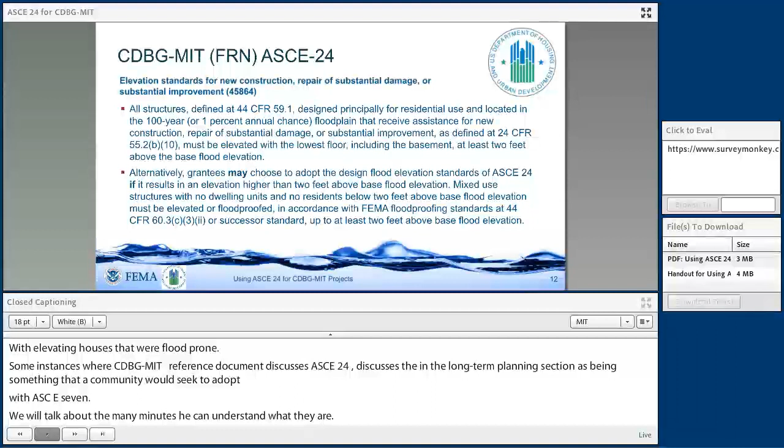One, that all structures located in the special flood hazard area, that's that 100-year floodplain or 1% annual chance floodplain, that all those that are new construction, repair of substantial damage, and substantial improvements be elevated with the lowest floor, including the basement, and we'll talk about that, to at least 2 feet above the base flood elevation.

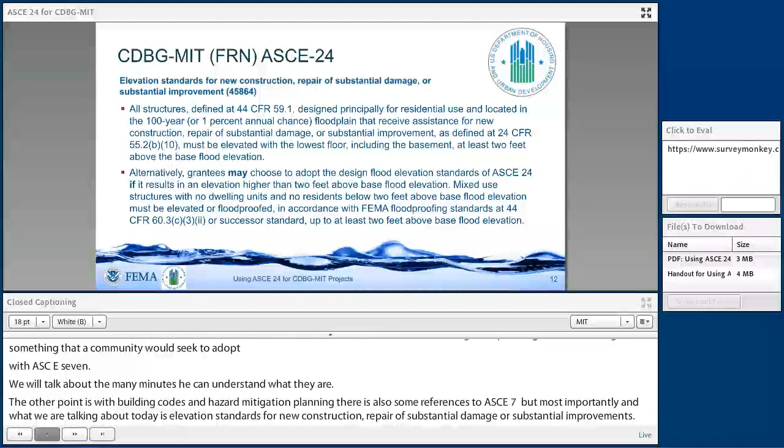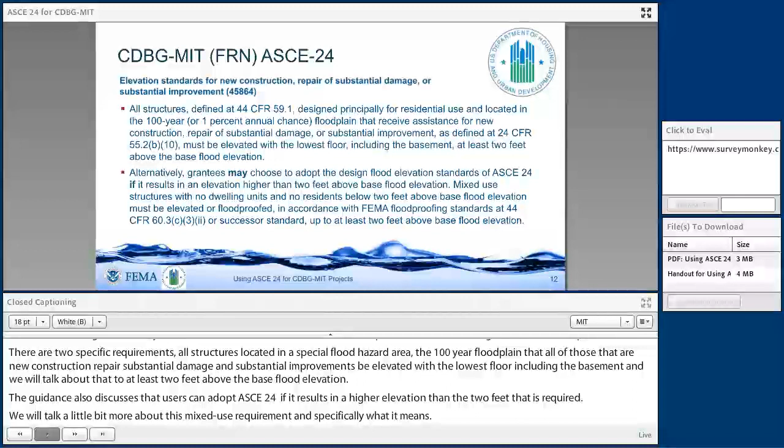The guidance also discusses that users can adopt ASCE 24 if it results in a higher elevation than the 2 feet that's required. And then we'll talk a little bit more about this mixed use requirement and specifically what that means. But a lot of what that means is you have buildings where you may have residential and commercial or non-residential uses in the same building and how those requirements apply. So we'll spend a little bit more time on that in a few minutes.

There's some handouts that you guys can download. The handout on using ASCE 24 has a copy of the agenda, who the speakers are. There's a description of flood design terms if you're not familiar with those, acronyms. Working in this industry, we use a lot of acronyms, and I wanted to clear up what those were so people didn't have questions. There's a guidance document on using a flood map and how to read the flood map and what the different parts of it mean.

There's a document on highlights of ASCE 24, flood-resistant design and construction, and that was put together by FEMA Building Sciences, so that's attached. And then we're going to spend a little time talking about non-residential structures, so we'll get into the use of the FEMA floodproofing certificate if you're not familiar with that, and I wanted to just make sure that you had that in your hands so that you could spend some time looking at that if you're looking at a floodproofing project.

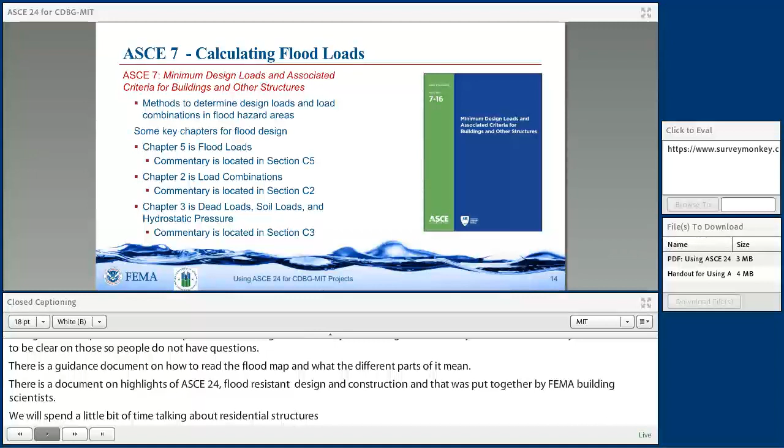So I'm going to go into two standards pretty quickly. This one first, because it's also mentioned in the guidance. ASCE 7 is the minimum design loads and associated criteria for buildings and other structures. This is where engineers would actually calculate the loads associated with buildings. And so it tells you how to calculate the loads and then how to use the flood loads in addition to the other loads that might be on the building.

So that may be the people inside the building, the live loads, that may be the dead loads or the actual weight of the building, as well as things like the wind loads, and if you're in an earthquake-prone area, the seismic loads. Chapter 5 specifically addresses the flood loads, and then you'll see there's a list of the commentary section. That's just a more descriptive section on that. Chapter 2 is on load combinations. As I just said, that's actually how you pair those loads with the other loads to the building.

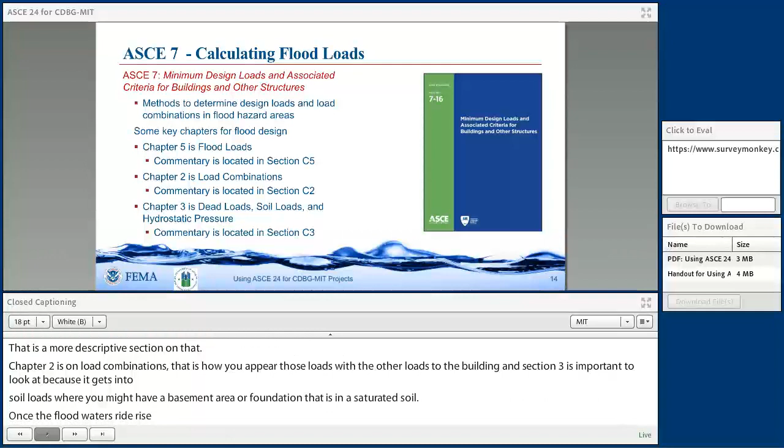And then Section 3 is also important to look at because that gets into soil loads where you might have a basement area or you might have a foundation that's in a saturated soil. So once the floodwaters rise, how those floodwaters and the soils combined are impacting the building. So those are all sections that you'll want to look at if you're looking at these flood prone projects. And then ASCE 7 and ASCE 24 are actually kind of used together in conjunction.

So this is the flood standard, that's flood resistant design and construction. It addresses construction materials, design and engineering requirements. It tells you some references for testing of materials and sort of what those other associated standards look like. ASCE standards are developed through a consensus process. That means there's balloting in a committee and there's a public review process. And these people that are on these committees are industry organizations and professional associations, along with FEMA's got representation.

So ASCE covers construction materials, design and engineering requirements and testing procedures. As I said, it was a consensus document, and it was worked on by several industry organizations, professional associations, as well as there are also engineers, contractors, as well as federal government representation. And it's typically incorporated into the building codes through a reference.

So a brief overview of the sections. Section 1, or chapter 1, is a general section with scoping and definitions and some basic requirements, also the tie to ASCE 7. Chapter 2 are the basic requirements for most riverine flooding areas, so areas where there's not a high coastal hazard. And then Chapter 3 are high flood risk areas. You'll see a listing there of different types of areas where there may be extreme flood conditions.

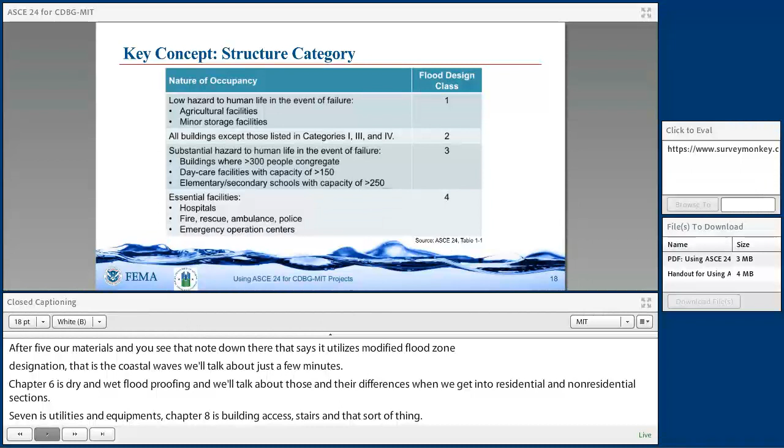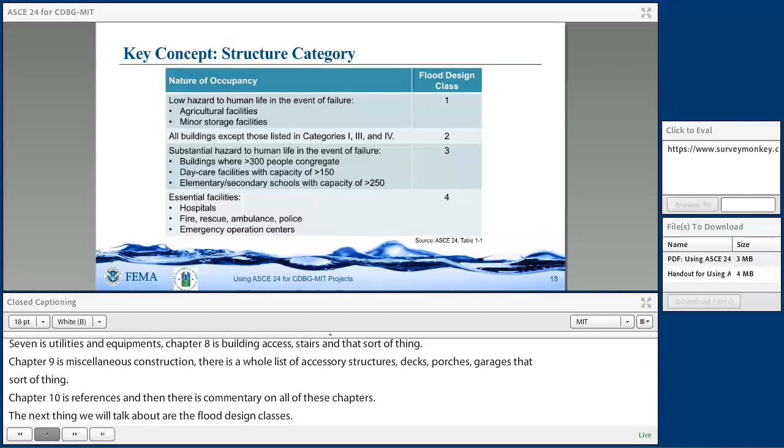And the next thing we're going to talk about are these flood design classes that buildings are broken into. So there's approximately 4 classes. Class 1 are mainly agricultural type buildings. Class 2 are the majority of buildings. That's going to be mainly your residential and non-residential commercial type buildings. Class 3 are going to be large occupancy areas like schools, but also a lot of your utilities like water treatment and wastewater treatment facilities fall into this. And then flood design class 4 are essential facilities. Think hospitals, fire, rescue, ambulance, police, and then emergency operations centers.

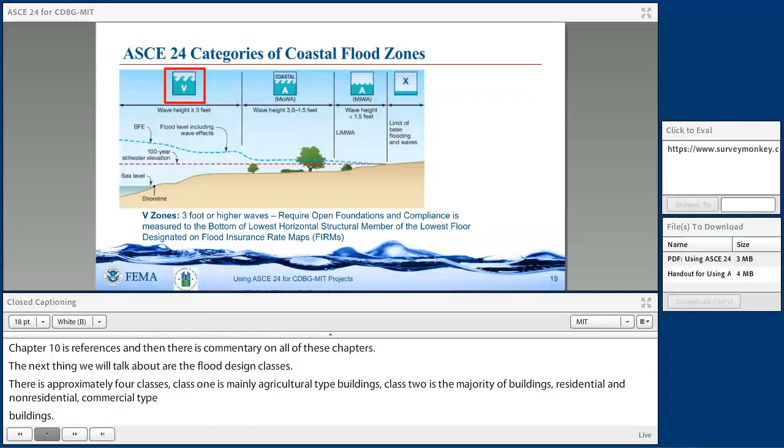So talking about these flood zones that ASCE 24 covers, the V zone are areas right along the shoreline where we have 3-foot or greater waves. There's some specific requirements to what the foundations need to be built to in these areas and how high the buildings need to be. We're going to show you a diagram later on that talks about this bottom of the lowest horizontal structural member as how the elevation is rated.

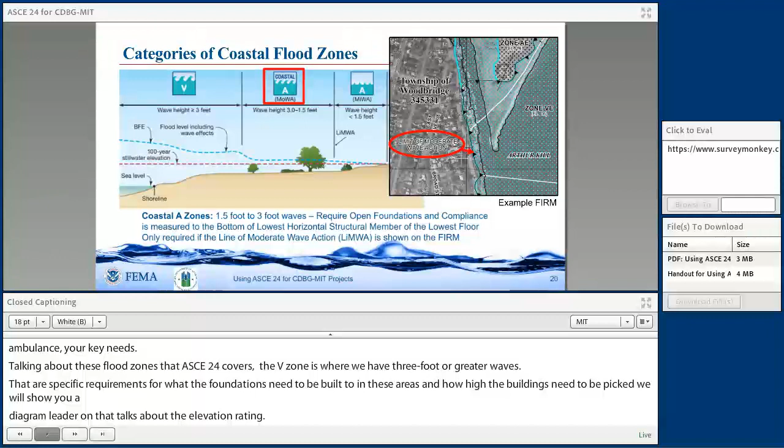So then we get into coastal A zones. That's where we have 1.5 to 3-foot breaking waves. ASCE 24 requires similar compliance to the V zone in these areas, and these are newly mapped on the more recent flood maps, and we've got a diagram that shows where they are. You're required to use these when the map actually delineates that or when the community delineates that. And A zones are areas where we have less than 1.5-foot waves. In these areas, your standard compliance is similar to what you're used to probably in riverine zones.

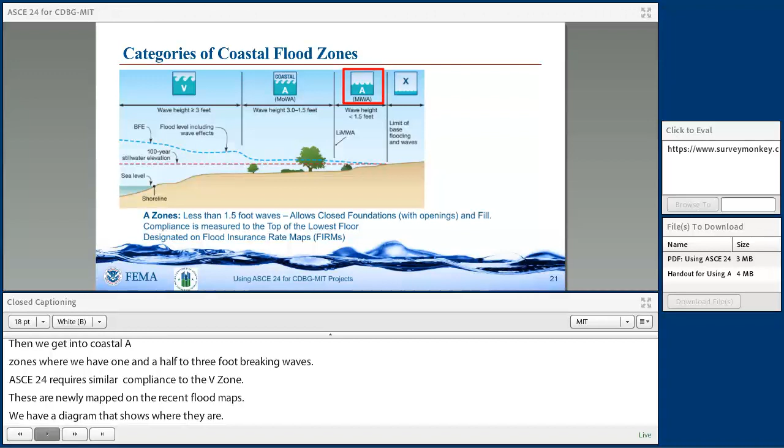The next thing I am going to talk about is these riverine zones and what those flood zones look like. There's a whole list of different flood zones for these. We typically refer to these as A zones, but you'll see them on the maps listed as A zones, AE zones, and on the older flood maps, A1 through 30. These are typically areas where you're within the 100-year floodplain, and that's broken up into 2 main sections. There's the flood fringe, which are those outer areas, shown with fill, those darker shaded brown areas, and then the floodway, where we want to try and limit construction because that's where the majority of floodwaters are conveyed during a flood event.

But you'll see the different types of flood zones and what they mean. Areas like AO zones are areas of shallow flooding, and there may be a depth of flooding in some of those, and other times there's not. In those, the rule is that the minimum requirement is 2 feet above the highest adjacent grade. It's a little trickier when you're using ASCE 24 to figure out what to do, but pretty much we're equating that 2 feet above grade with what the BFE is effectively in those areas in terms of minimum construction requirements.

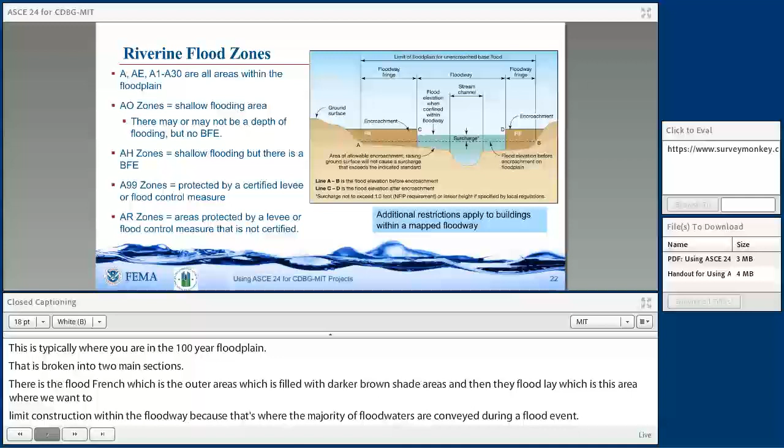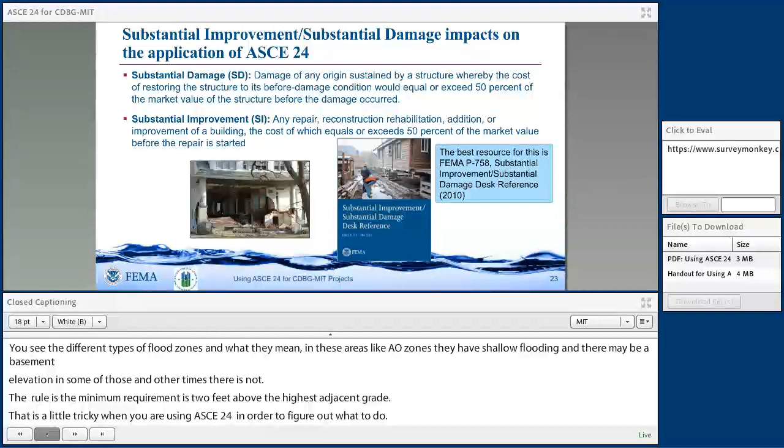As we look at these types of buildings, when we looked at the type of the requirements, it referred to new construction, substantial improvements, and substantial damage. And so I thought I'd want to talk about what substantial damage and substantial improvement are.

Substantial damage is once a building that's constructed within the 100-year floodplain is damaged by anything, that could be flooding, but it could also be a fire or tornado, wind event. If the damage or the cost to repair the structure exceeds 50% of the market value of the structure before the damage occurred, then it's determined to be substantially damaged, and it needs to be brought into compliance with whatever that community's current requirements are in terms of whatever their floodplain ordinance says. So it needs to be brought current.

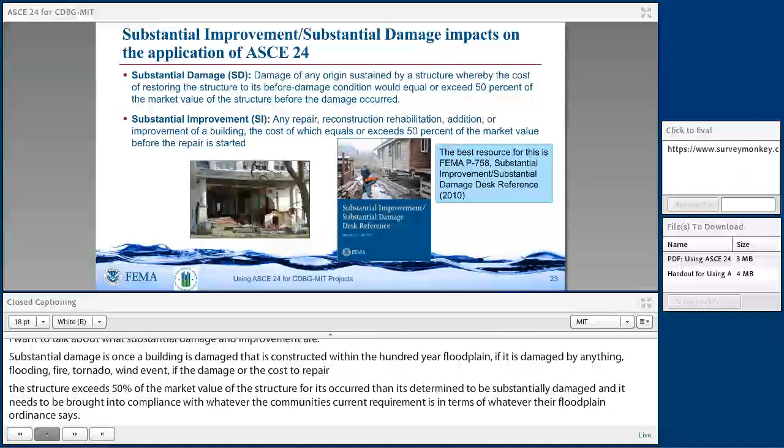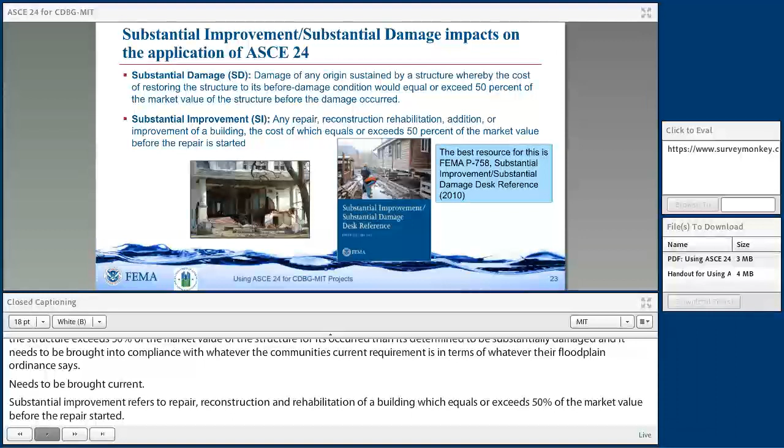Substantial improvement refers to repair, reconstruction, rehabilitation, additions, that sort of thing, of a building which equals or exceeds 50% of the market value before that repair started. There's a lot more nuance to this, and that's provided in FEMA P758. That's the substantial improvement and substantial damage desk reference. And typically the way that I look up these FEMA documents is I go to a web browser, I type in FEMA, and then whatever that publication number, in this instance it's P758, and then from there you can usually do a search and it'll come up pretty quickly.

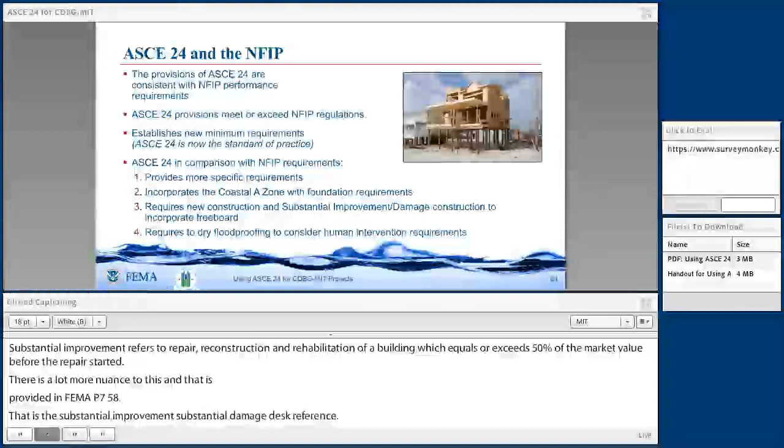So ASCE 24 and the National Flood Insurance Program, how do those two match up to each other? ASCE 24 is consistent with the National Flood Insurance Program. It meets or exceeds those National Flood Insurance Program requirements, and it establishes effectively the new minimum requirements because it's become the standard of practice with respect to the codes and a lot of adoptions with states and local governments.

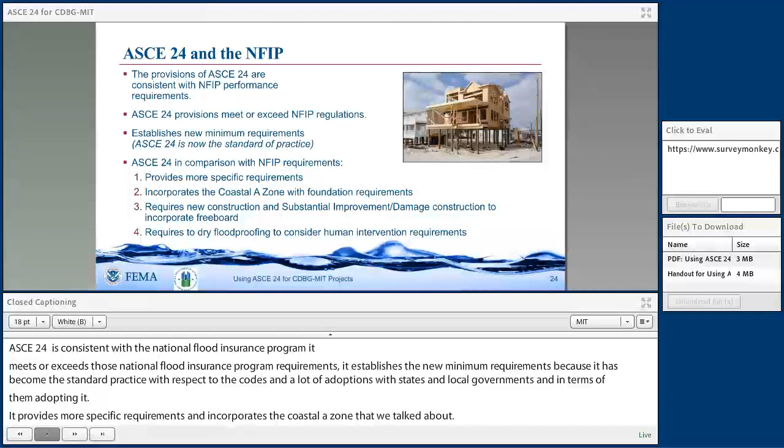ASCE 24 provides more specific requirements. It incorporates that Coastal A Zone that we talked about, and it has foundation requirements specific to that. It requires new construction, substantial improvement, substantial damage construction to incorporate freeboard. And with the HUD standard, we'll talk about how that changes with ASCE 24. It requires dry flood proofing to consider human intervention. Human intervention is when people need to install things or react in order to prepare the building to be dry flood proofed.

So how does ASCE 24 and the CDBG-Mitigation Programmatic, how do you make sure that there's compliance with ASCE 24? So if you don't have new construction or substantial improvements, in a lot of instances you may not be able to comply or be required to comply with every provision of ASCE 24, even if you have said you were going to use it as part of your grant application in terms of adopting it as part of a larger program. And you may have some instances where you're retrofitting buildings, such as elevating houses, where you may not be able to comply completely with ASCE 24, and certain sections may be deemed to comply. And I'll talk a little bit more about how that works when we talk specifically about elevation projects where you may be leaving part of the foundation in place.

Just to note that city or state building codes may require compliance with ASCE 24, and adherence to ASCE 24 may be required for compliance with other funding sources. So, for instance, if you are using this with many of the FEMA grant programs for a more recent disaster, then you are likely required to comply with ASCE 24 the way that the new policy is written. So after, I think it's September of 2016, those disasters declared after that date are going to be required to comply with ASCE 24. So you do need to look at your funding source.

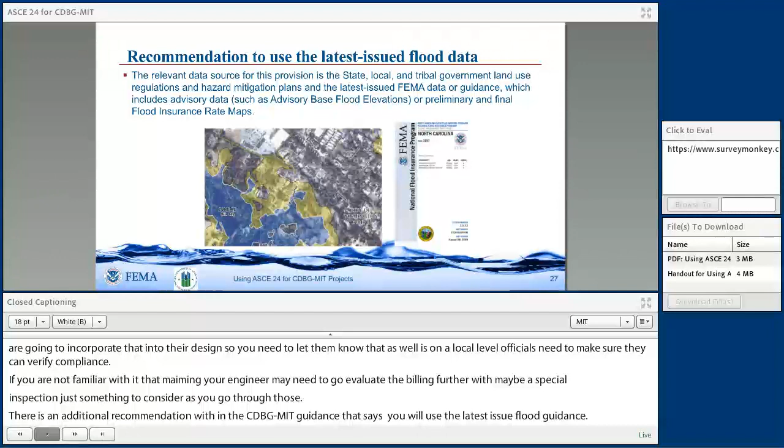There's an additional recommendation within the CDBG-MIT guidance that says that you're going to use the latest issued flood guidance. So that could be the latest, including things like preliminary flood maps, as opposed to just your effective maps. It could be using ABFEs. Those are advisory base flood elevations. So you're going to have to go through and look at what that latest flood data is that's available for that site, and apply that as part of the recommendations on using the latest flood hazard data.

Applying the CDBG mitigation projects with codes and standards and ordinances. The requirements for the projects are that they need to meet state and local ordinances. If no code exists, then the proposed project should meet a code that may be a model code that's current. And then you want to make sure that you're not in violation of any federal laws, regulations, or statutes. So you're agreeing to all of those things. If you're not in compliance with those three things, then you may have some issues with eligibility requirements.

So plan on doing a code compliance check; each project should go through a code compliance check. You should make sure that you're meeting those substantial improvement, substantial damage requirements. Those requirements are consistent for National Flood Insurance Program communities, and that's not even an ASCE 24 requirement. That's a minimum NFIP requirement. So if you're part of that program, then you're going to do that substantial damage, substantial improvement determination. And then there's lots of classifications of work that the international codes reference, and you're just going to need to make sure that you understand what the requirements of the code are with respect to that classification of work.

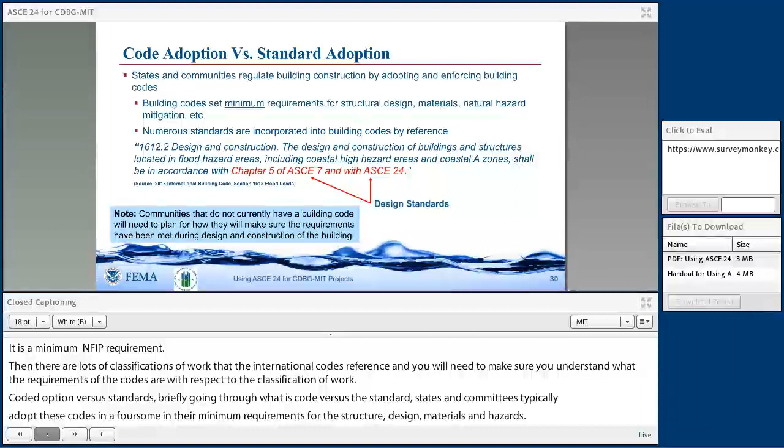So code adoption versus standards, just briefly going through what's a code versus a standard. States and communities typically adopt these building codes and enforce those, and those are minimum requirements for the structure design, materials, and hazards. And then these standards like ASCE 24 and ASCE Standard 7 are usually referenced within sections of the code saying that they will be designed in accordance with, for instance, ASCE 7 and ASCE 24. So those standards are referenced within the building codes as to what needs to be followed.

So using it with residential mitigation projects, this applies mainly to single-family, multifamily, and residential portions of mixed-use buildings. Typically, this is retrofit elevations, so think about jacking up a building, or reconstruction of a building. So this may be a building that's so damaged that it makes more sense to tear it down and then reconstruct it. Another instance is if you have a building that's in poor condition, and if you elevate that building, the wind may knock it down. It may be less expensive to just reconstruct the building. This could also happen when you compare elevation cost versus constructing a new building. There are instances where it's just that costly to elevate the building.

Dry floodproofing is not an allowable mitigation measure, but we will cover it in the next section. And then wet floodproofing, this is basically using flood damage resistant materials and flood openings to equalize the flood loads on the inside and outside of the building walls, and that's only allowable for parking areas, building access, and storage areas. Prior to design, you should look at which provisions of ASCE 24 apply and make sure that you're going to apply it to all the components that you can make comply with ASCE 24.

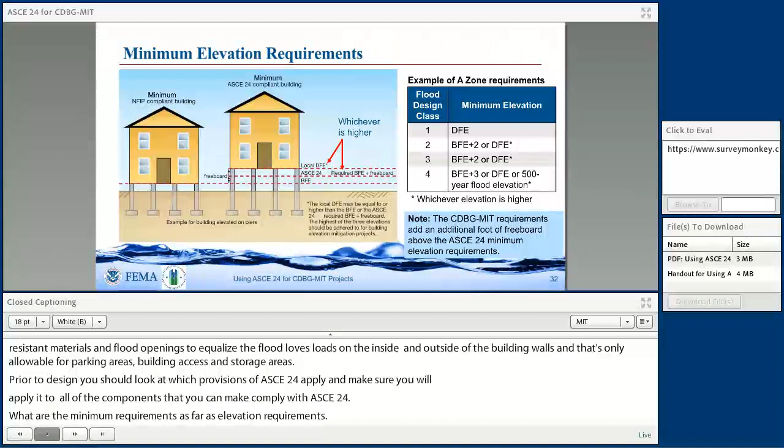Now, there are specific definitions of what that lowest floor means, because if you have a basement, that basement is included as the lowest floor. A basement would be an area, that's in your handout, where you have four walls that are below grade, and in those areas that may require you to fill the basement and no longer have that basement in that house if it's in a special flood hazard area, and then the lowest floor would be the next higher floor.

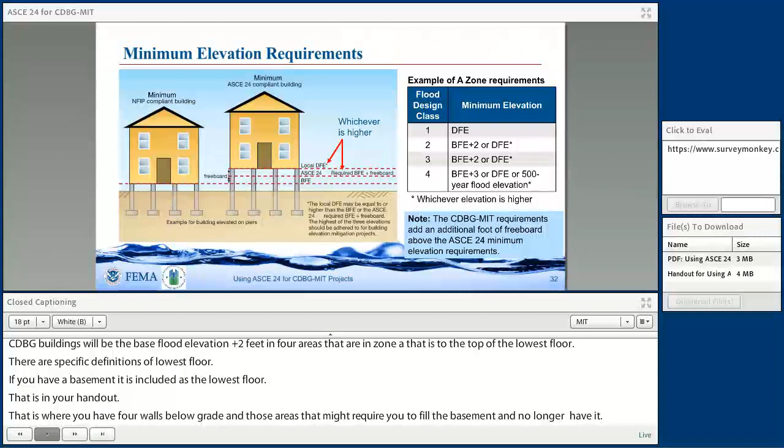So there's a requirement of BFE plus 2 unless you're talking about a critical or essential facility, and then it's BFE plus 3 or the DFE. So for residential, just think of BFE plus 2 as those minimum requirements. So in V zones and coastal A zones, similar, it's at BFE plus 2, but this is to the lowest horizontal structural member, and we've got a diagram coming up that'll show you what that is.

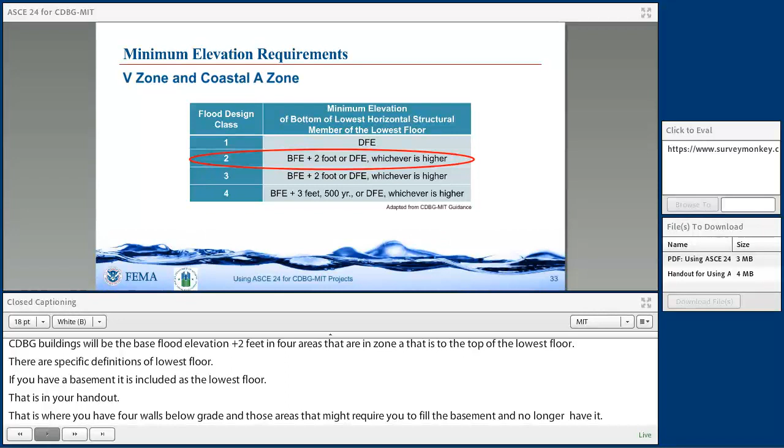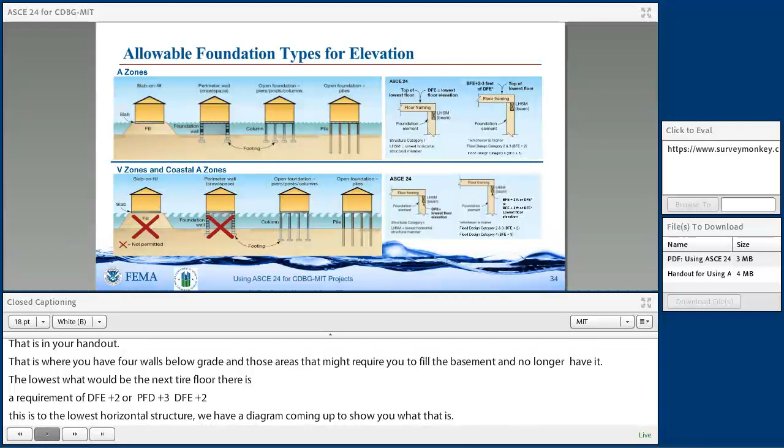So if we're looking at this, the allowable foundation types in an A zone: you're allowed to use fill, you're allowed to use walls, you're allowed to use columns and piles, all as allowable foundations. And in these A zones, the requirement is to the top of that lowest floor that's shown there on the right. If we look at the bottom area, the V zones and coastal A zones, these are areas where there's high waves and the water is moving very quickly. We're not allowed to use fill, and we're not allowed to use solid foundation walls.

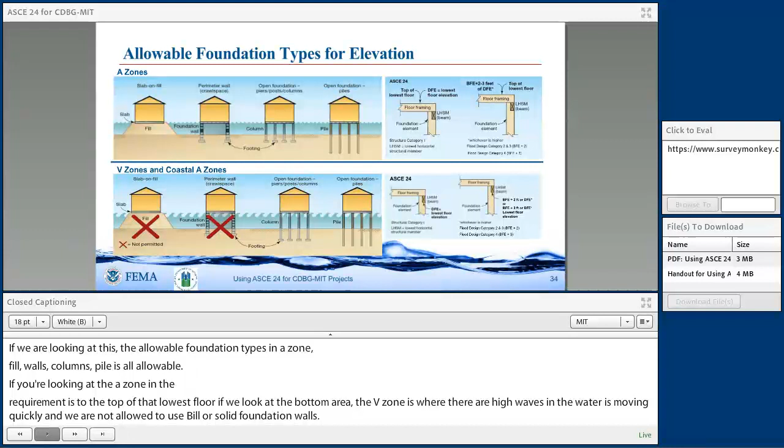So we're looking at open foundations, columns, and piles, and ASCE 24 then requires you to use that elevation guidance to the bottom of the lowest horizontal structural member, and that's shown in the diagram to the right, as you can see that kind of cross-hatched piece of lumber that would be coming out towards you if you're looking at this, and that's the bottom of that lowest horizontal structural member.

So foundation design in A zones is going to be required to resist flotation, collapse, and permanent lateral movement under these design loads, under these flood loads. It's the moving water, the still water, the buoyancy or the uplift, and then you have to have adequate connections between the foundation and the superstructure, which is just the main portion of the house. And then you need to either meet the building code or ASCE 24, whichever is more restrictive.

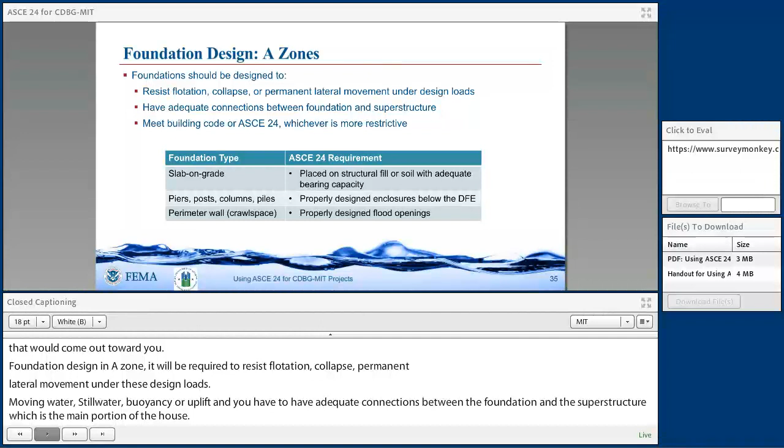And we've got some guidance on slab on grade, piers, piles, columns, posts, open foundations, as well as crawl spaces. And the big difference you're going to see with crawl spaces is that they're required to have flood openings. So we want to equalize the water on each side of those foundation walls using flood openings.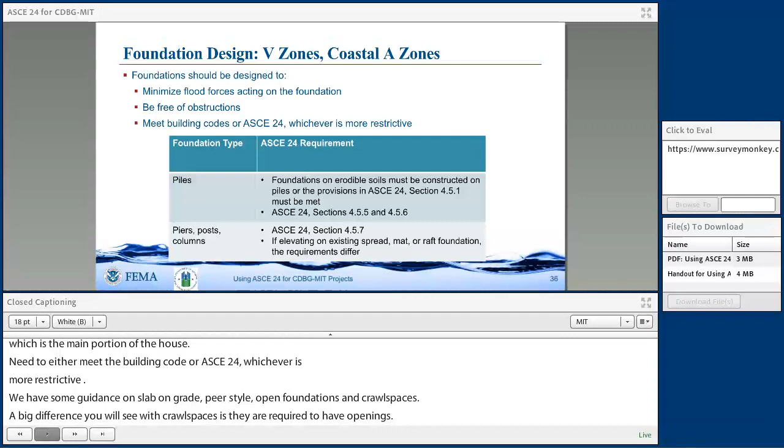If we look in V zones and coastal A zones, again, these are open foundations, and we want to make sure to minimize the flood forces acting on the foundation. We want to be free of obstruction, so we don't want anything such as foundation walls to be in the way, and we want to let that water flow in and out pretty easily. So this is piles, piers, posts, and we've got a description of what sections of ASCE 24 would apply in these areas.

So foundations in V zones: we need to verify, when we're doing design in these areas, that the existing foundation elements will be able to resist the loads, and apply those loads to existing and new portions of the foundation. So if you're elevating a house and you may be using a portion of the existing footings or some section like that, you need to check those loads on there too.

Now, how ASCE 24 may need to be deemed to comply is you may not be able to do all the checks on that existing footing section that you would with something that an engineer had designed from scratch and was constructed from scratch. So that's where you may be deemed to comply.

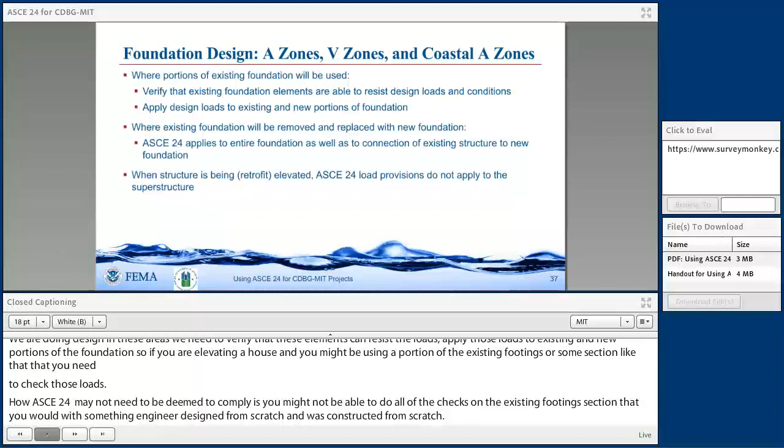And then ASCE 24 provisions don't apply to the superstructure when you're talking about elevating a house. If you were building a brand new house, there would be sections that would apply to the superstructure of the house. And ASCE 7 would apply to the superstructure of the house, but mainly we're concerned with the engineer saying that the foundation elements meet ASCE 24 when we're talking about retrofit structures.

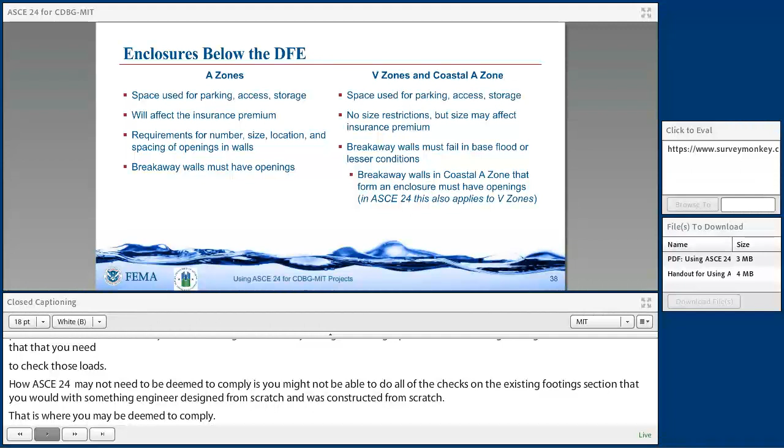So enclosures, these are the walls around the bottom of the building. In an A zone, they can only be used for parking, access, and storage. Having those walls will affect your premiums, and then there are requirements on those flood openings about the number, the size, location, and then if you do have breakaway walls, which you can have in coastal areas, where somebody puts some wall around the building, those walls are supposed to have flood openings regardless.

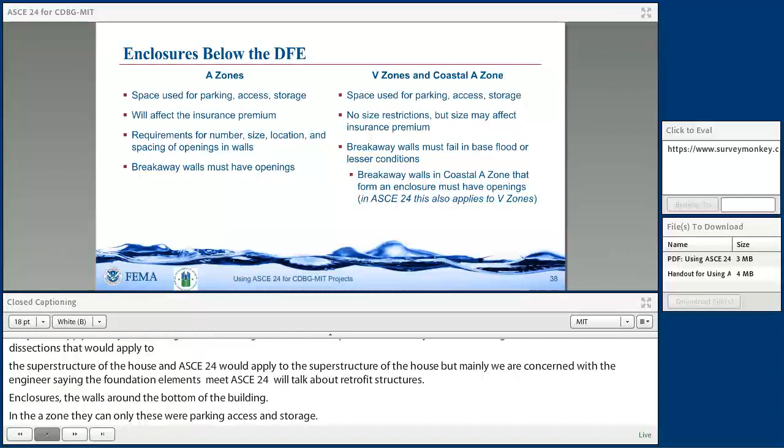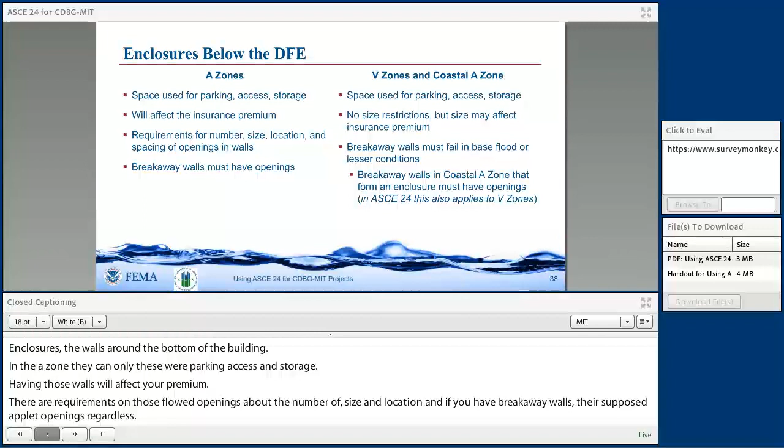If we're talking about V zones and coastal A zones, again, the same uses apply. Anytime you have any sort of walls that are breakaway walls, or if they're actual walls, those are going to have insurance implications for the building. There are requirements that if you've got lattice and screening that meet certain requirements, that will be considered free of obstruction, and that's not going to be an additional insurance premium for you.

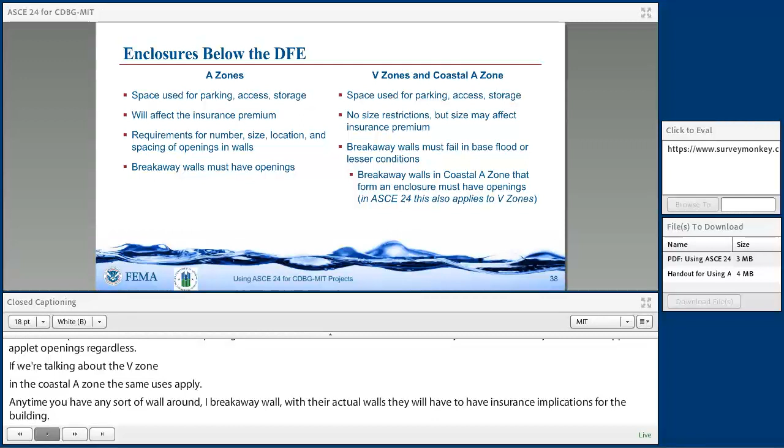Breakaway walls must fail under a base flood or lesser condition. And the big thing with adopting ASCE 24 is that in coastal A zones, you need to have flood openings. That's a requirement that's in ASCE 24. It also applies to V zones in ASCE 24, where there's a requirement for flood openings now. So if you use ASCE 24 and you've got a building in a V zone with breakaway walls, it's required to have flood openings.

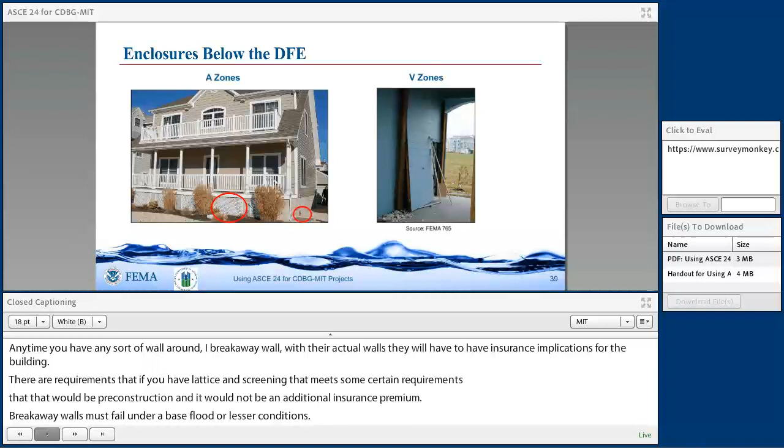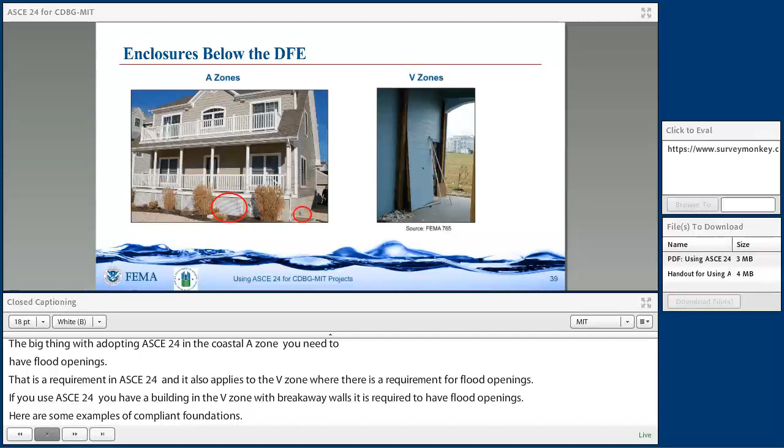Here's some examples of compliant foundations. You'll see on the left there's a house that's got some lattice work on the front porch, and then you'll see that circle that's a flood opening around that crawl space wall. And then if we look in V zones, this is a post-disaster photo of a breakaway wall that actually performed as we would expect.

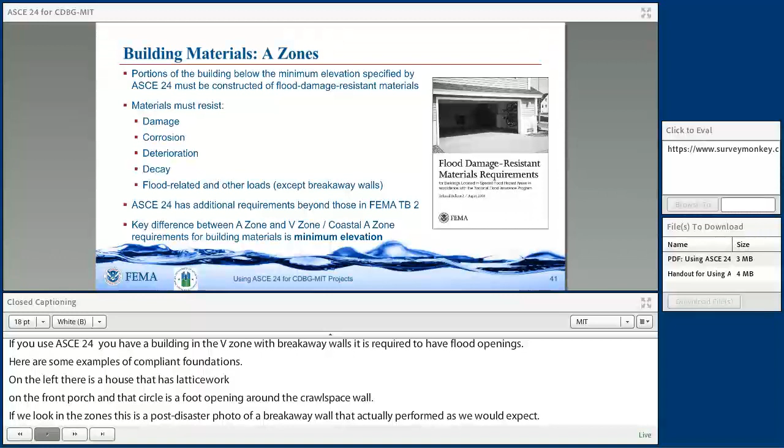Building materials in A zones, and these are going to basically apply in V zones, need to be constructed with flood damage resistant materials. FEMA has a Technical Bulletin 2 that outlines a lot of what these types of materials are. That material must resist damage, corrosion, deterioration, and decay for 72 hours with minimal damage, and it's basically defined as cosmetic only damage.

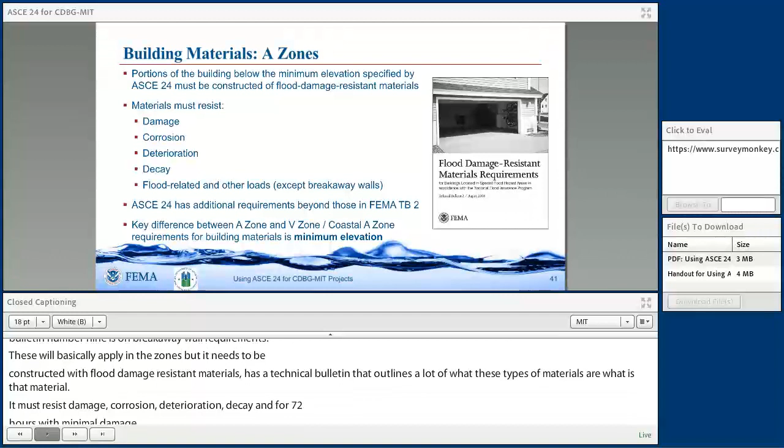There are some specific requirements in ASCE 24 that are more restrictive than Technical Bulletin 2, so you do want to look at that. And then the key difference, if you're looking at A zones, V zones, or coastal A zones, is just the minimum elevation that you're required to go up to. So basically, how high do you need to be taking those flood-resistant materials?

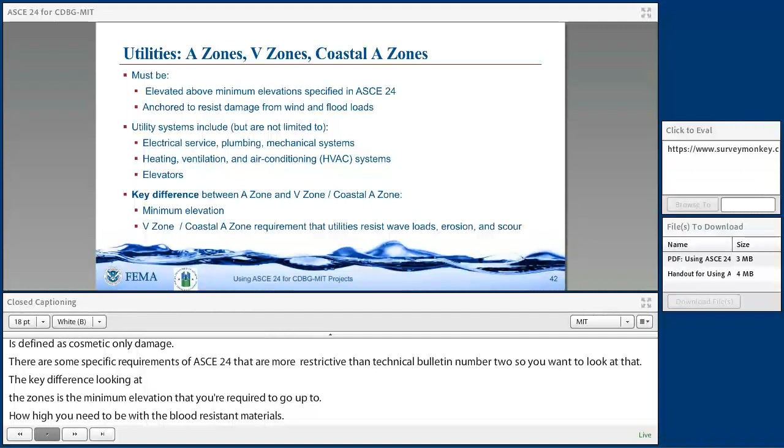Utilities must either be elevated, or if you can't elevate some of these utilities, they're allowed below that base flood elevation if they're designed, constructed and installed to prevent floodwaters, including any backflow, from entering and accumulating within the components. So there's some specific requirements on those if you can't elevate them.

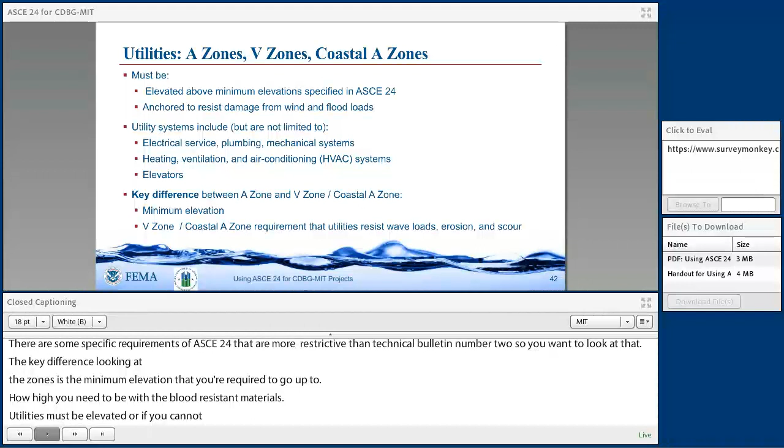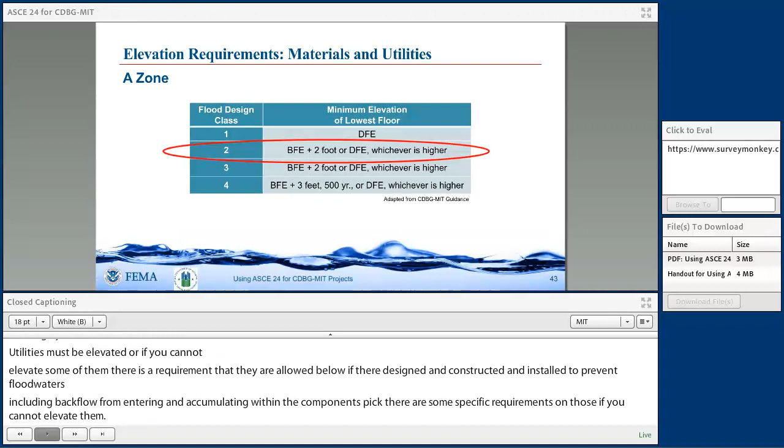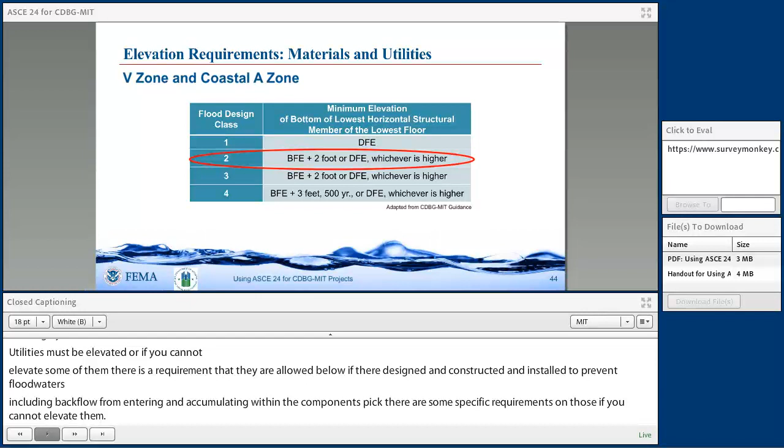These utilities are MEP systems, elevators, lifts, as we talked about earlier, and ASCE 24 does give you some minimum elevation requirements for each of these areas. If you're talking about V zones and coastal A zones, there's additional requirements about wave loads, erosion, and scour that these utilities need to be designed to resist. So in A zones, it's BFE plus 2. In V zones, it's again BFE plus 2, but remember we have this higher elevation for the lowest horizontal structural member that happens in V zones.

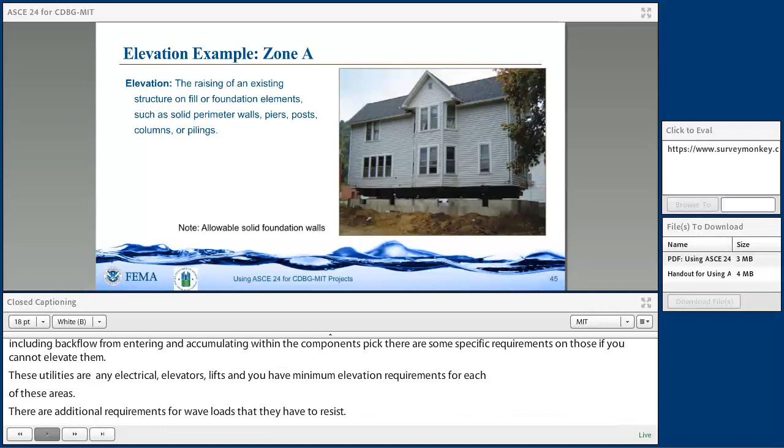So if we're looking at elevation, this is actually lifting up or jacking up a house, raising it in the A zone. This is just building that new foundation wall around it, and you're allowed to use solid foundation walls provided you're incorporating these flood openings.

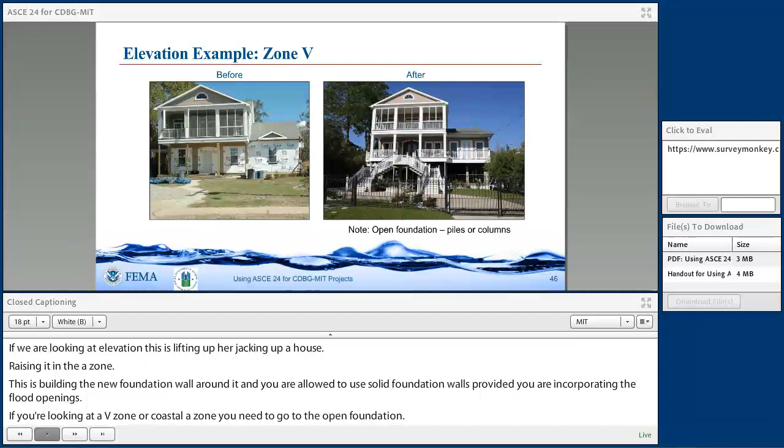If you're looking at a V zone or this coastal A zone, then you're going to need to go to an open foundation. If you look at the before picture on the left, the house walls go all the way down to just above the ground, and then you'll see in this picture on the right that that's an elevated house on an open foundation where they've had to use columns in this instance.

So applying it to elevation projects, there's foundation types that are allowable, and that'll be dictated by the flood zone. We showed those earlier. It needs to be able to resist flotation, collapse and lateral movement. If you're using any existing foundations, you're going to have to verify that those components comply as much as possible with ASCE 24. You need to have these flood openings that we discussed, all these materials below need to meet Technical Bulletin 2, and these utilities need to be either elevated or protected, as we discussed.

If we're talking about mitigation reconstruction, this is where you have a building that you're going to just take down, the entire building, and build a new structure. If you're using ASCE 24, the entire building needs to comply with ASCE 24. And there's references within ASCE 24 that say that you're going to comply with ASCE 7.

So if that's going to be your requirement, then the entire building must be treated as a brand new structure, and you're going to have to meet ASCE 24 and ASCE 7 by reference for that new building in its entirety. So if you're going to say that you're going to meet ASCE 24 as part of your CDBG mitigation grant, then you need to understand that that's what that requirement is going to be.

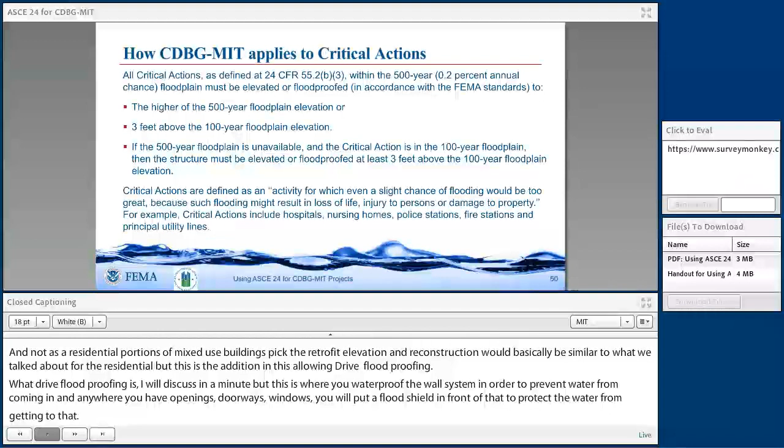So how does it apply to critical actions? So the critical actions requirement is that you'll either meet that BFE plus 3 feet or the 500 year, whichever is higher. One of the other things to consider is if the 500 year is unavailable and the critical action is within the special flood hazard area, then the structure must be elevated or flood-proofed to at least the BFE plus 3.

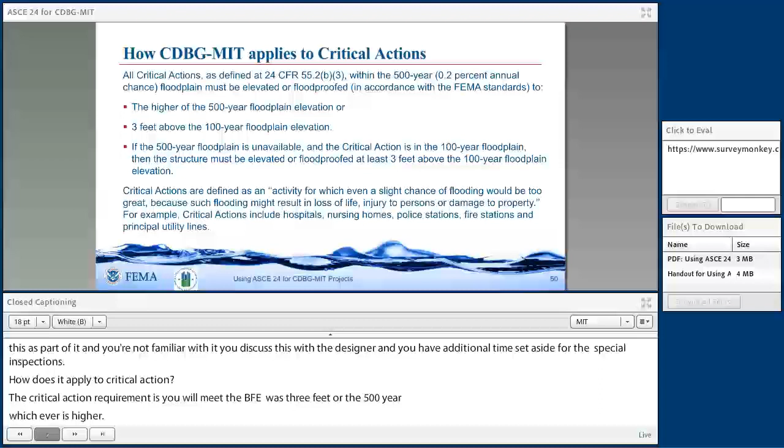So what are these critical actions? Examples of it would be hospitals, nursing homes, police stations, fire stations, or principal utility lines. So that could be more inclusive, for instance, if you're going to consider your water treatment or wastewater treatment utility lines as principal utility lines, and that may be more restrictive than ASCE 24 in this instance.

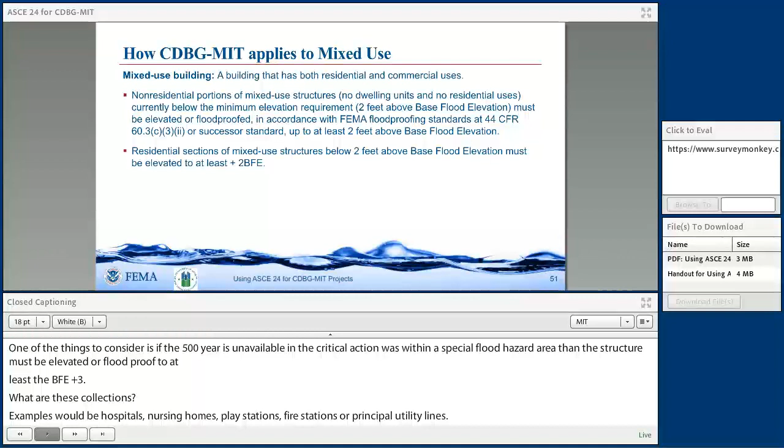So a mixed-use building, this is basically might be, say, an apartment building where you've got apartments on the upper floors and commercial on the lower floor, or maybe you've got some other non-residential governmental use on that lower floor. So this would get broken up into the non-residential portions of the mixed-use building and the residential.

And to simplify this long bullet, basically, for those non-residential portions of the building, you're required to either elevate those or dry flood-proof those to that base flood elevation plus 2 feet. For the residential sections and all of the associated components that would be used by those residential sections, that needs to be just elevated to that base flood elevation plus 2 feet.

So this gets a little bit more tricky when you're talking about these buildings, because you may have utilities, for instance, that are used by both the residential sections and the non-residential sections, and in that instance you would need to comply with the residential section, because that's going to fall into that category.

And mainly where this breakup of residential versus non-residential happens is with respect to the National Flood Insurance Program. Those requirements specifically address residential versus non-residential. So that's part of where these requirements are coming from, is compliance with the National Flood Insurance Program.

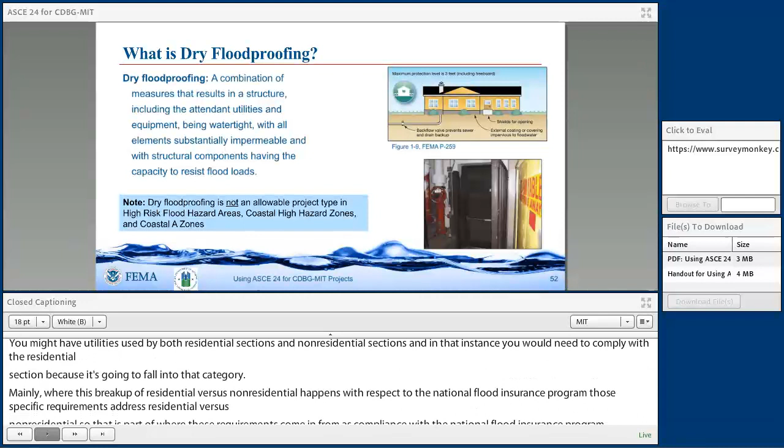So dry flood proofing, as I said, this is using a waterproofing measure to protect the building. It is not allowable in these V zones or these high flood risk areas, coastal high hazard areas, and the coastal A zones. So it's not allowed in those areas. So this is just allowed in A zones if you're going to use dry flood proofing.

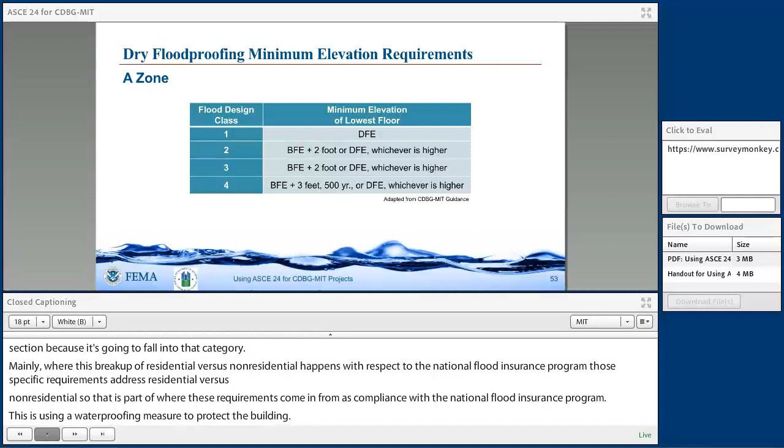So the requirement is, again, base flood elevation plus 2 feet, or the local requirement. There may be a local requirement that's more restrictive, whichever is higher. Again, there's kind of a 3-part requirement if you're getting to these Class 4 buildings: the BFE plus 3 feet, the 500-year, or the DFE when you're talking about these critical actions.

So applying it to dry flood proofing, you need to meet the elevation requirements and the flood zone restrictions. There's also a flood velocity restriction: if the water is moving more than 5 feet per second, you can't do dry flood proofing. So there's material aspects of ASCE 24.

There's a requirement for substantially impermeable without the assistance of sump pumps, and substantially impermeable means that you would accumulate no more than 4 inches of water within that dry flood-proofed area over 24 hours. Sump pumps are required as a means to remove the accumulated water, so think about that 4 inches of water. How are you going to get that out? There's egress requirements, so getting people out. And then there's flood warning times of 12 hours that there's restrictions about.

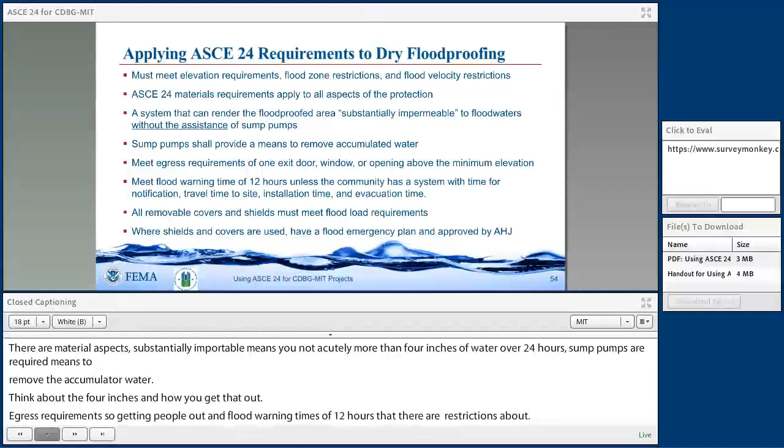Also, looking at your covers and shields and making sure those meet the load requirements, and that if those covers and shields are used, that you've got a flood emergency plan, think about an operations and maintenance plan, and when are you going to implement these measures, and all of that needs to be provided to the authority having jurisdiction per ASCE 24.

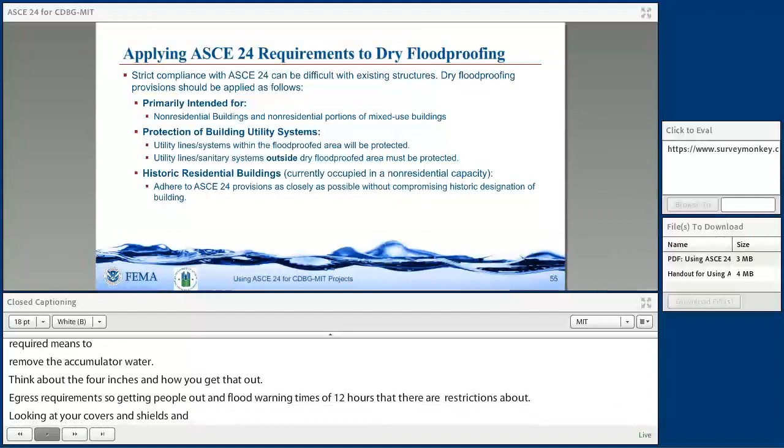So looking at these requirements, again, dry flood proofing is primarily intended for non-residential buildings. This could include utility systems. The other place that we see people sometimes looking at it is with historic residential buildings that are currently used in a non-residential capacity. So think about an old house that may have been turned into a law office or some other type of business, or a governmental office, and those may also look at dry flood proofing. So we're not looking at the occupancy of the building when it was originally constructed, but the current occupancy of the building.

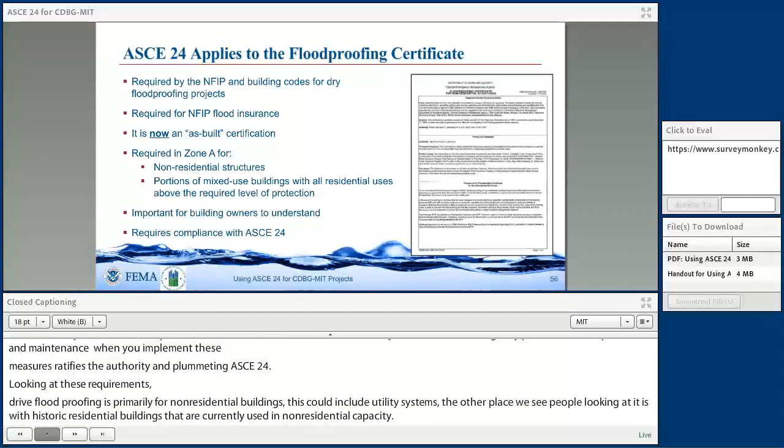And there are limited instances where you can do dry flood proofing in residential buildings, but we're not going to cover that in this, primarily because ASCE 24 was designed for substantial improvement and substantial damage, and it also eliminates a lot of the requirements when you start looking at historically designated buildings.

If you opt to dry flood proof, there's a flood proofing certificate. It's required by the National Flood Insurance Program for flood insurance purposes, but also you're required to submit some documentation of flood proofing to the authority having jurisdiction. You'll need to check with the authority having jurisdiction about what flood proofing verification they're currently using. The types of documentation are outlined in 44 CFR 60.3 in terms of what all is required.

But this new form that we have right now is an as-built certificate. That means it was designed and constructed to meet ASCE 24. So here's another time when ASCE 24 is required if you're going to use this floodproofing certificate. It talks about what it's intended for, which is basically non-residential structures, and then also mixed-use areas where there's non-residential use.

It's important that building owners understand what's involved in it as well as the people signing it. And again, it requires compliance with ASCE 24 when you sign that. And that needs to be signed by a registered design professional in the state where that floodproofing is done.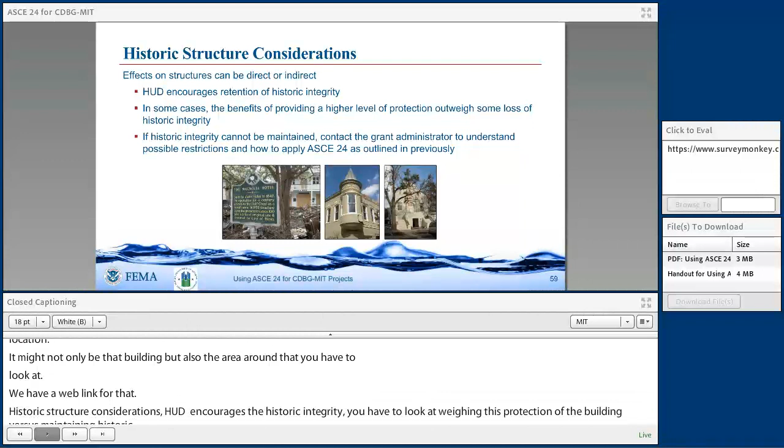And if you're planning on using ASCE 24 as part of your grant program, then you'll have to figure out how that's going to apply in those instances. So you'll need to consider these when evaluating those effects: the height, scale, proportions of the building, the architectural character, the footprint, orientation, location, landscape features, the archaeology, site evaluation, and then how it may impact adjoining structures or historic districts. So those are all factors that you're going to need to look at when you're talking about historic buildings.

So to just kind of wrap all this up, we've talked a lot about what ASCE 24 is, what the requirements are, and that sort of thing. But again, it is a recommendation with respect to these CDBG mitigation grants. It's a tool for you to use, and you should really evaluate the benefits of using ASCE 24. It can be used to reduce building and contents damage during a flood event. It's an increased factor of safety.

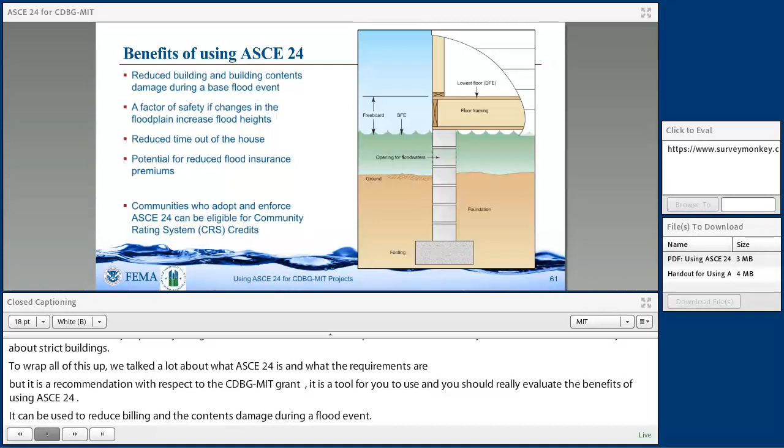Now, when you're applying these minimum elevation requirements of HUD, you're going to get an additional foot above what those minimum requirements are, but also looking at all of the other requirements, materials, and that sort of thing that go into ASCE 24 and how it is a holistic approach to protecting the building during flood. So all of that amounts to a total factor of safety, and that's one of the reasons why you want to look at doing it.

If you're looking at homeowners or even business owners, it can reduce time out of the house or the building after a flood event, even if the owners have and maintain flood insurance. Flood insurance doesn't cover displacement. There's other programs associated with that, but a lot of this displacement and business loss is not covered in a regular flood insurance policy, only the building and the contents. And so there's some additional benefits you've got to kind of think about.

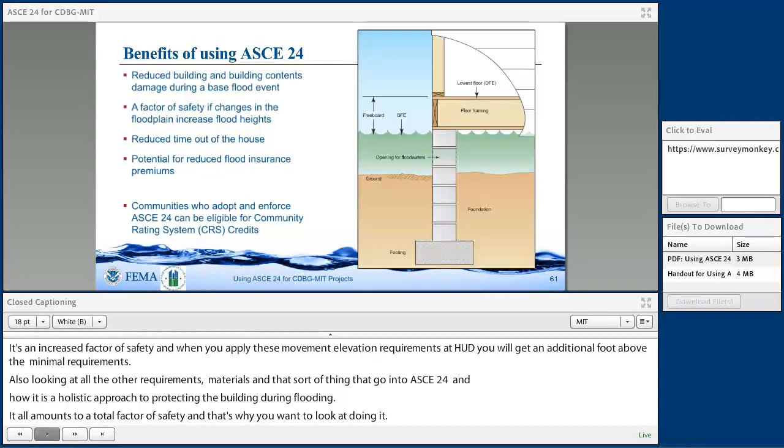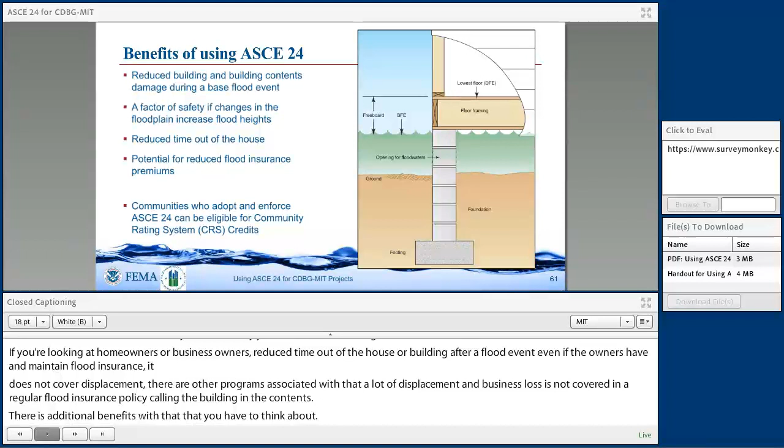And then, because you're going up above that base flood elevation, it has the ability to provide you with lower flood insurance premiums. So that's another additional factor. And then communities who adopt and enforce ASCE 24 may be eligible for Community Rating System credits. So if your community is enforcing this and you're part of the Community Rating System, your policyholders throughout your community may be eligible for an increased break in their flood insurance rates.

So for getting access to ASCE 24, we've got a web address here, and you can also purchase it through the American Society of Civil Engineers. I don't have a current price on it, I apologize, but it is available for sale there. Let's see if I can click.

Okay, FEMA resources. Several years ago, and there's a specific slide on this, there was a guidance document about using this with hazard mitigation assistance, flood retrofitting projects, and reconstruction projects. I'd encourage you guys to download a copy of that and look at it, but there's also highlights of ASCE 24, the 2014 version. That document is already in your handouts, but there's also a 2005 edition. FEMA 259 is retrofitting residential structures, so this is how the elevation process works and some other mitigation options.

FEMA 348 is looking at your mechanical, electrical, plumbing systems, those building systems and how to protect those. FEMA 55, if you're in a coastal area, is the Coastal Construction Manual. It would be helpful for you to use this not only for residential but non-residential buildings in coastal areas, just to understand how flood loads work. And then FEMA 936 is the floodproofing of non-residential buildings, the how-to guide on dry floodproofing. We also discussed the NFIP technical bulletins, and all of these have links. If you go to the FEMA Building Sciences publication page, there's a link right there.

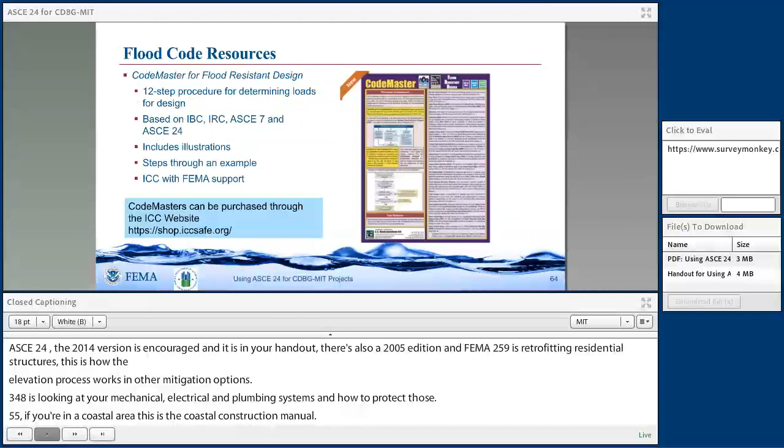We would also encourage you to think about getting a copy of the Codemaster. This is a 12-step procedure on determining loads for design with respect to the codes and meeting the flood provisions within the code. It's based on the IBC, the IRC, ASCE 7, and ASCE 24. It includes illustrations and a step-by-step example, and it was done through the International Code Council with FEMA support, and I've provided a link for you to the ICC website.

This guidance for using ASCE 24 for hazard mitigation projects, I'd encourage you to download and look at this. It's not the actual ASCE 24 standard, but it gives you some overviews, and it talks about how to use it with a grant. There's some helpful checklists and guidelines and how to look at it with respect to benefit cost analysis if you need to still do that and that sort of thing too.

And that's just really helpful also when you look at these retrofit projects where you're having to deem to comply, where you may be keeping portions of the existing foundation or something like that, and you're going to have to figure out how to apply ASCE 24. Remember that CDBG mitigation requirements are more restrictive with respect to the elevation, but there's also some other good guidance that's within this.

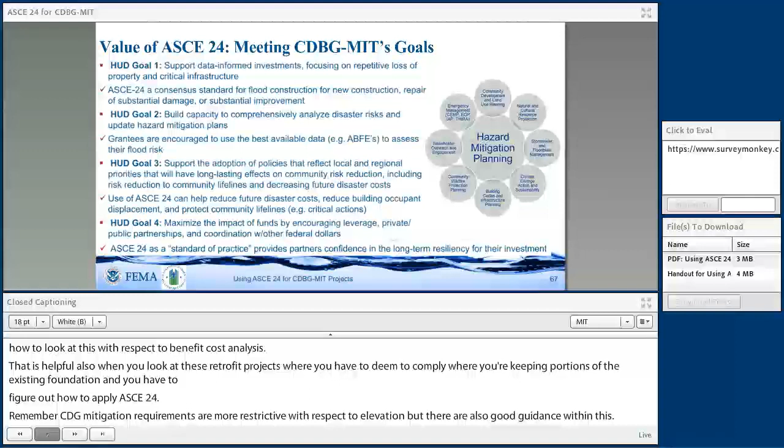Certainly covered a lot of ground, and wanted to just remind the grantees here that this is certainly a standard that can be used if you opt to do it. And a couple of things I want to point out before I get into the exact slides here. So Adam pointed out some different foundation types and height requirements connected to where the structure is located in a special flood hazard area. He certainly spoke to the standard here and how it may be triggered if you have a substantial damage or substantial improvement.

Adam certainly talked about some of the requirements for critical actions and connected to the energy lifeline if you have a principal utility line that you're looking to address. And certainly that's important for critical services both before, during, and after a disaster. I've mentioned this in previous webinars, and I think it's very relevant for today.

We've talked about in previous webinars the value of mitigation and leveraging your federal funds, and so the publications that have come out in 2017 and 2018 have pointed to the value of mitigation. So for every dollar spent in terms of federal funding, particularly when you look at disaster-resistant building codes, it could yield up to $11 in benefits. So certainly looking at disaster-resistant building codes and standards such as ASCE 24 can be an important pillar or aspect of how our grantees can promote their long-term resilience strategy.

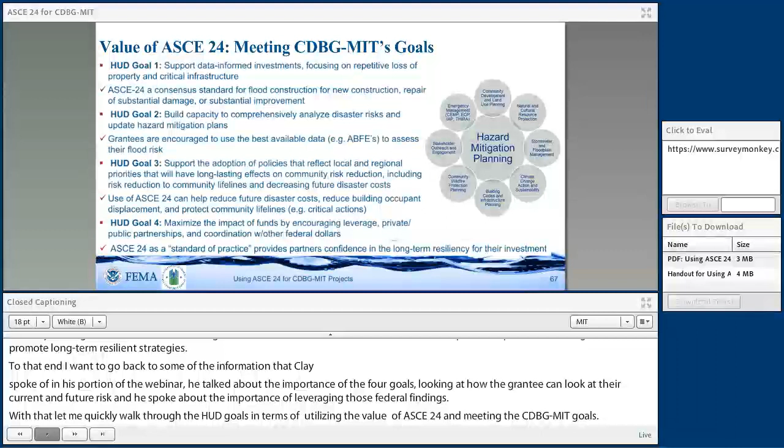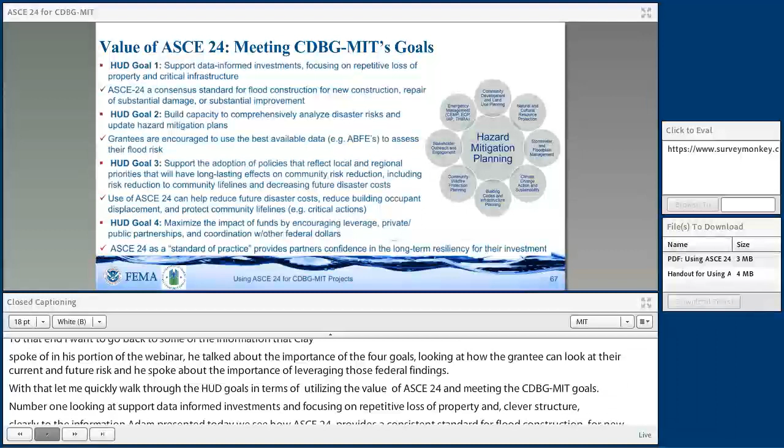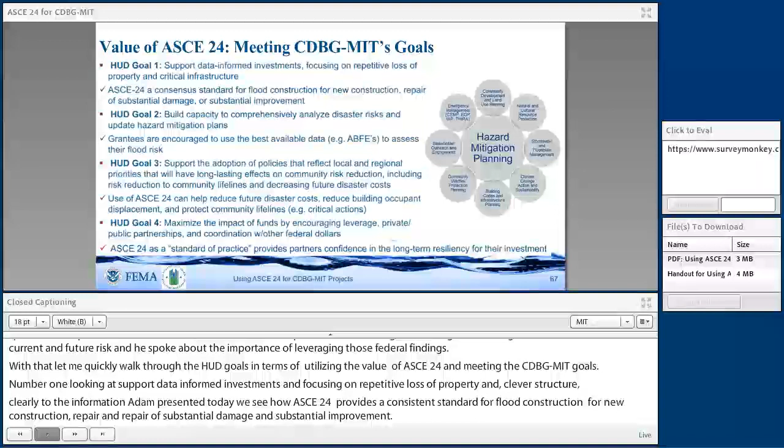For HUD goal number 2 that Clay spoke of, he mentioned building capacity to comprehensively analyze disaster risks and then updating your hazard mitigation plan. And you can see the circles there on your right are some examples of ways that you can do that as a grantee. But I would certainly like to point out the value of the mitigation plan in developing your mitigation strategies. That hazard identification and risk assessment component can be leveraged by the CDBG-MIT grantees in their action plan and in building their mitigation needs assessment.

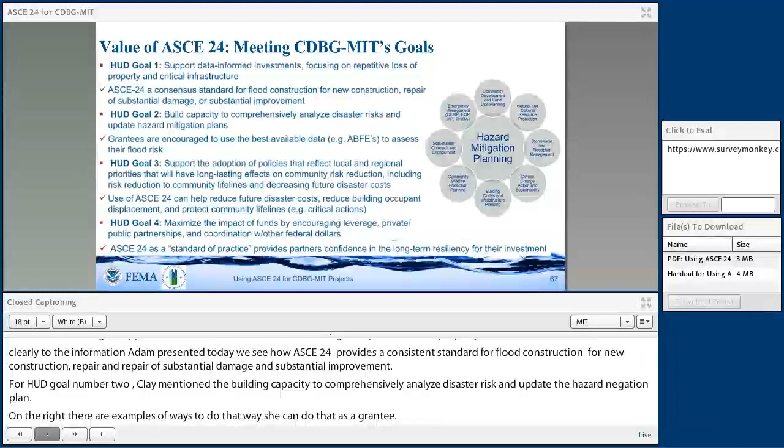For HUD goal number 3, that looks at supporting the policies that reflect local and regional priorities, driving down disaster costs, protecting critical lifelines, and having a long-term community risk reduction effort. To that end, use of ASCE 24, again, I think Adam spoke to this at a high level, can help reduce future disaster costs, reduce building occupant displacement, and definitely protect community lifelines. And he mentioned the primary utility lines as an example.

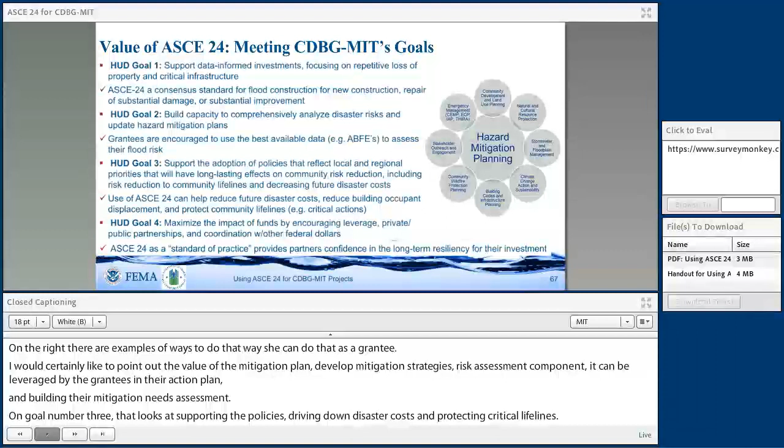Last, we have HUD goal number 4, which is maximizing the impact of leveraging your public and private partnerships and then coordinating with other federal dollars. Certainly, Clay spoke to that in the beginning. I reemphasize that. And then the information that we have from Adam takes a look at leveraging ASCE 24 as a standard of practice and providing partners confidence in the long-term resiliency of their investment.

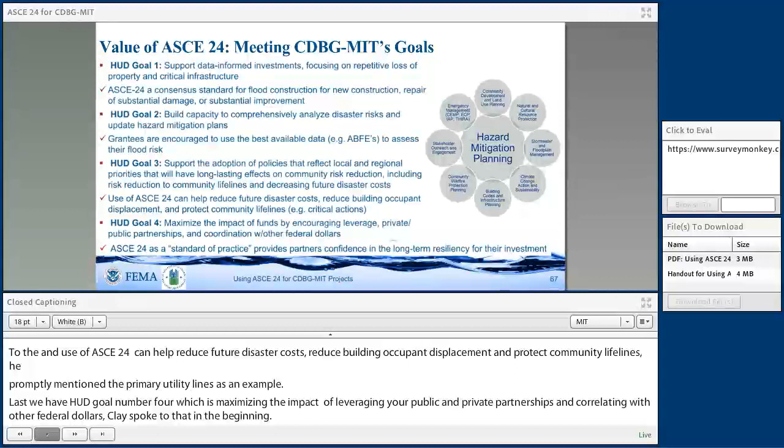Also, starting last fall, we had the CDBG-MIT 2019 webinar series, and all of those have been recorded, and the transcripts were provided, and also the slides. As you're building out your action plans for CDBG-MIT, this may be relevant and important to help design your particular program.